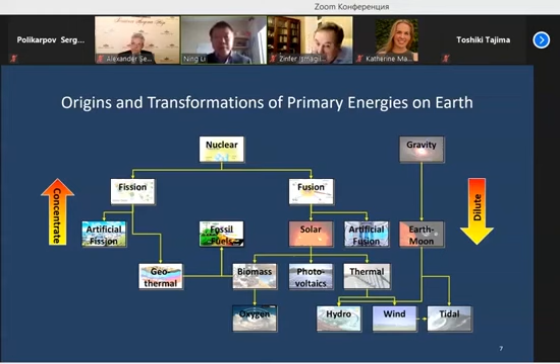So the only thing on Earth, in the natural form of primary energy, is fossil fuel, which is naturally concentrated for us by the geothermal and chemical process. And this is the qualitative picture.

Now if we look at it more quantitatively, I want to distill everything down to the most fundamental interaction forces. I'm using electron volts for each unit—whether it's atom, nucleus, or molecule—to look at what energy barrier you have to overcome, what the energy release is, and what the thermal energy or operating temperature of the system is.

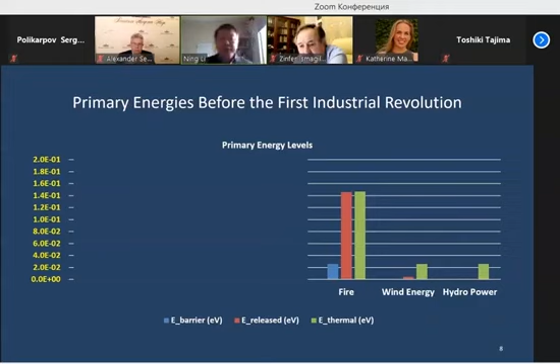So on this scale, which is only milli-electron volts to tenths of electron volts, you can see fire is much higher than wind and hydro. We got helped by nature because of lightning, striking of stones, etc., and then we were able to use fire as our primary energy before the Industrial Revolution. And then we discovered the use of fossil energy.

And of course, we also had solar energy, which is the largest growing energy in the last decade or so. From this year on, I think it's going to be the dominant new capacity of energy generation globally. And we're also helped by nature, because we're able to use fire and naturally existing reactions preceding this seemingly more difficult form of energy.

So that shows the potential of what nuclear can do, if we use the energy from nuclear fission and nuclear fusion. Now I have to use a logarithmic scale to put everything together in one picture, so you can see the progression of the difficulties of using them, and also the potential of using them.

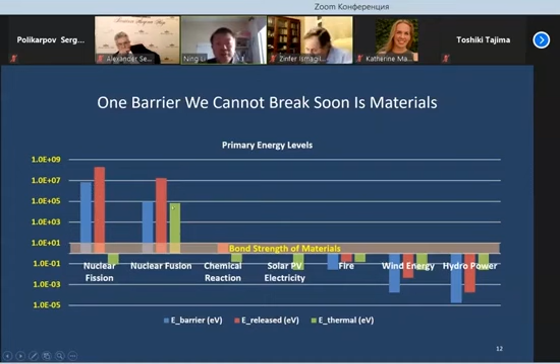Now, fission is very different. Fission has to solve a whole different set of problems than fusion. So we've had this urgency discussion before, and here again is using that energy idea.

Look at just biological life, metabolism and lifespan—they are determined by the Arrhenius equation through activation energy. A 2-degree increase of average temperature on the surface of the Earth would increase metabolism by about 20% and shorten lifespan by 20 to 30%.

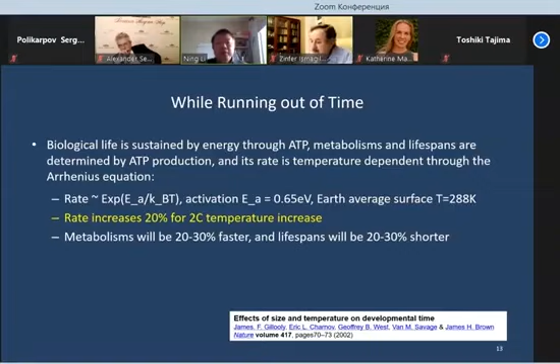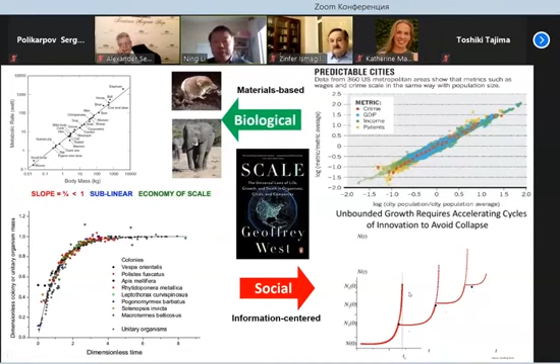This is a drastic change that biological evolution just cannot adapt to. And this isn't just happening in these particular areas—if you look at one of my favorite physicists, in a book about how social and city development is happening, they are all accelerating at a super exponential scale. So we're basically having a compounding problem, and the problem coming at us is bigger and faster.

So how do we apply this thinking and these constraints to our nuclear problem? Now, understanding the primary energy hierarchy and having a view of the cycles, we understand that artificial nuclear energy can only be utilized through heat. And it's not a driven system—they are not driven. We need to control them at criticality.

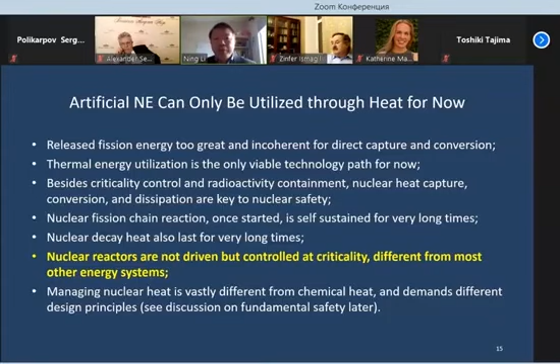And this is different from any other system, which will change—wholesale changes in the safety categories, in the design principles, and how we build and operate the systems. So by fundamental safety, I'm talking about typical reactor safety, but also expanded to include ecological, environmental safety, economic, regulatory, investment safety, and non-proliferation nuclear material safety.

And this will lead to a set of things we need to be doing. Now it looks like a daunting challenge—how do you do all this stuff in the short amount of time that's available? Well, if we go back again to the basics, we may be able to understand how we can do these things without bringing or minimizing unintended or unknown consequences.

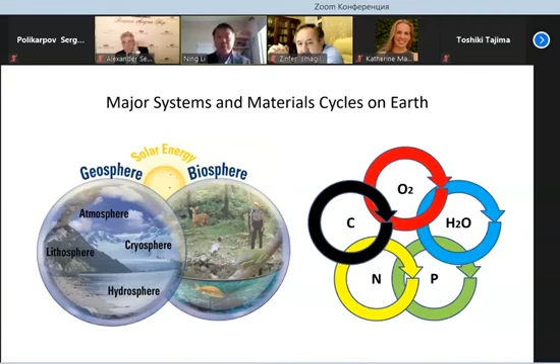If you look at the major systems and materials, all the previous six presentations in some ways talk about the systems we are in and the cycles, whether it's carbon, oxygen, water, nitrogen, phosphorus. These cycles, if driven by external energy, can be sustainable - it has been sustainable on Earth for billions of years. And because we are part of the system, using that system to generate energy is the most familiar approach to us, so we do a lot of it. And that got us into trouble.

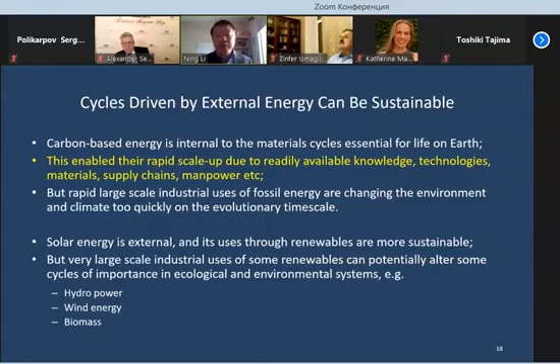One issue is we are able to scale these systems up very quickly, and once we scale them very quickly, we also cause ourselves all these problems. These problems are inherent in all the fossil fuels, but also in many of the renewable energy systems, because we are changing the system and the cycles.

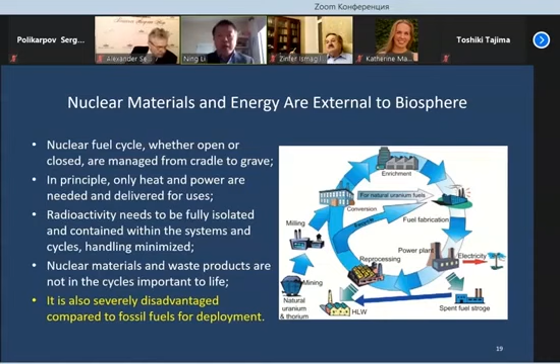So we have to somehow bring in this use of nuclear energy through some accelerated approach that minimizes this barrier.

Now, one of the barriers is how we think about nuclear energy. For over six to seven decades, we thought, based on early understanding and presumptions, that fissile elements were very rare, and we'd need a fast reactor with a high breeding ratio to meet growing energy needs. But the MIT study for the future of the nuclear fuel cycle in 2011 pointed out these assumptions are outdated and mistaken. And if we are working on outdated and mistaken assumptions, the more we do, the more trouble we get into - and we just can't move forward, as evidenced by nearly three decades of stagnation or decline of global nuclear energy.

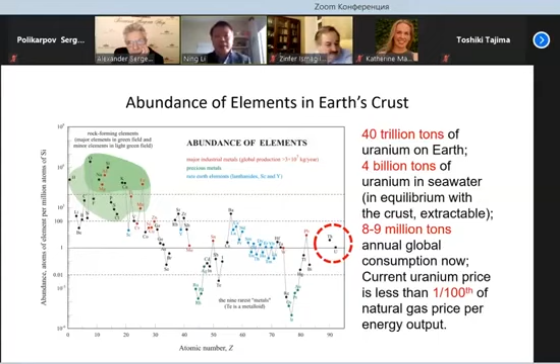If you look at these assumptions - what I call the cosmic energy cycle - thorium and uranium, with uranium being the predominant fissile material for nuclear power, are really, really abundant. We have 40 trillion tons of uranium in Earth's crust, and 4 billion tons in seawater, kept in equilibrium with the rocks. We only use 8 to 9 million tons per year globally right now. And the price per energy output is less than one hundredth of the price of natural gas. So we were designing and operating a system based on a totally different reality of the availability and cost of these resources.

Five minutes more. Yeah, okay.

The increasing safety requirements led to degrading economics and flexibility of deployment, which led to a lack of fundamental economic, regulatory, and investment safety. Current technologies often add complexity and cost, lacking fundamental assets in ecological, environmental, and regulatory safety. Mainstream reactor designs, adapted from early military uses, lack fundamental non-proliferation of nuclear materials. So on one hand we want more clean, low carbon energy, but on the other hand we have many headwinds opposing its growth and expansion.

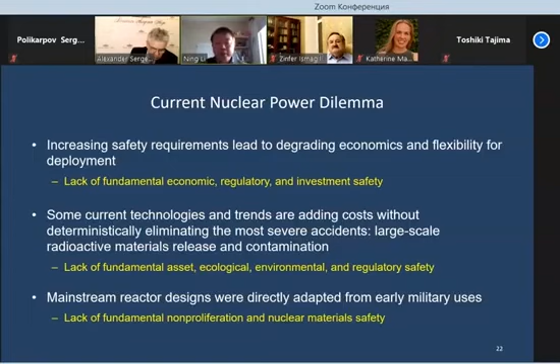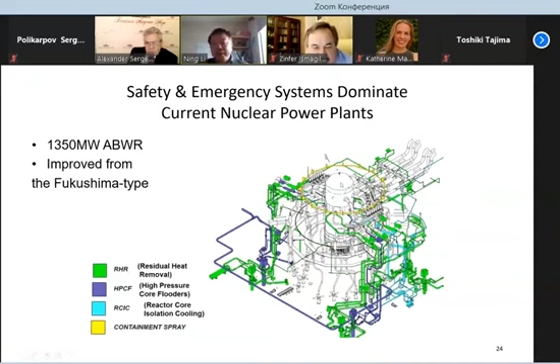In one picture, I can show that because of how we approach the design, construction, and operation of the system, we added layers and layers of safety and emergency systems without fundamentally eliminating the problem of nuclear power. Tracing the source: the power density of the fuels is too high, the radioactivity leakage barriers are not high enough, and the reactor designs have too much power and too high a power density. Not only are they only suitable for large baseload powering large grids, you can hardly build them in less than a decade or two. So you cannot do much about nuclear energy this way, and that's why it's lagging behind.

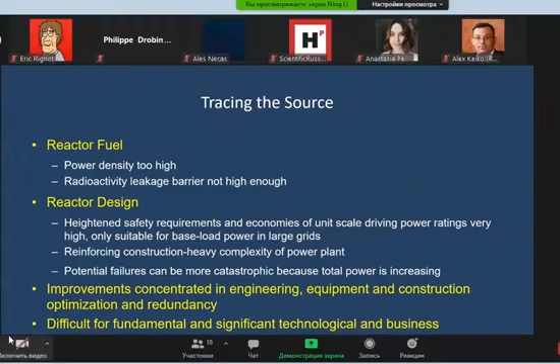So you step back with the understanding of the uranium resources, and then ask, why do we use nuclear power? We use electricity, heat, propulsion, and of course it needs ease and safety of ownership and investment. In this context we're also talking about mitigating climate change, and we have to scale up deployment in time, otherwise it becomes less of a contributor.

I don't have time to go into how these things were derived, because we are also developing and investing in these. This is what's built from the ground up, and we reached a more abstract level with these main points.

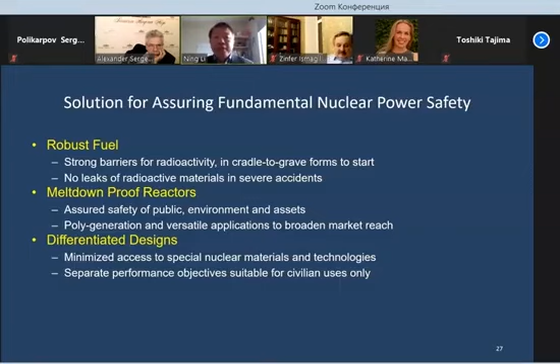One is we need robust fuel and meltdown-proof reactors, and also differentiated design. The safety-based design principles have to be rethought, because nuclear energy systems are so different from the others.

I saw an earlier presentation about effective power density of nuclear, which is actually lower than natural gas by his calculation. It's still missing the element that's considered there: nuclear power density, although it looks low, the energy density is 100,000 times higher, 10,000 to 100,000 times.

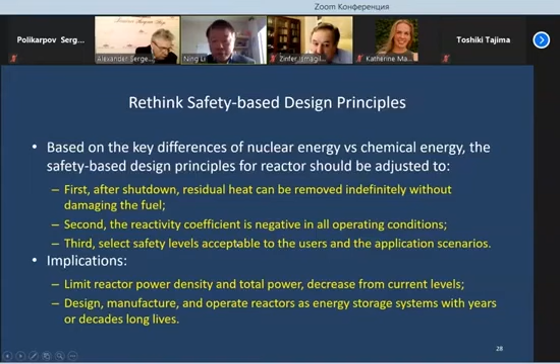So when a nuclear reactor stops, it's not a stopped system, it's still an energy system. We have to reconsider how we design the systems by considering the shutdown conditions and the operating conditions, then pick the level that's suitable to use. That will lead to a very different kind of nuclear reactor.

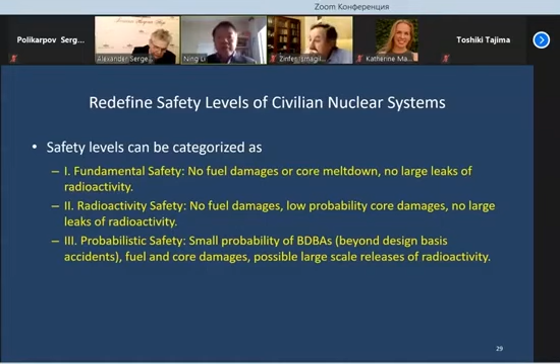Then we can redefine the safety levels: from fundamental safety, which is no fuel damage, no radioactivity leak, to radioactivity safety, where the reactor can be damaged but fuel is not damaged, to probabilistic safety, which is what's currently adopted - there's a small probability of those things happening.

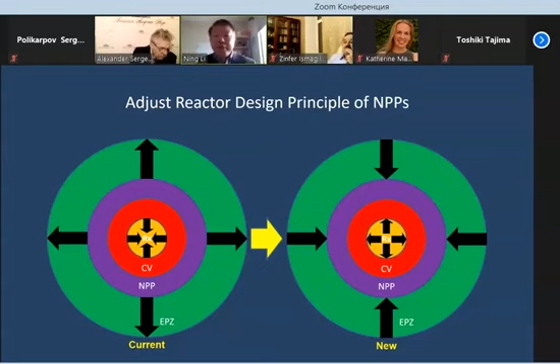That gives us, in a schematic way, how instead of making the reactor more compact with higher energy and total power, we should relax so that the consequences are reduced. So there's an optimization going on with this approach, and the differentiated design.

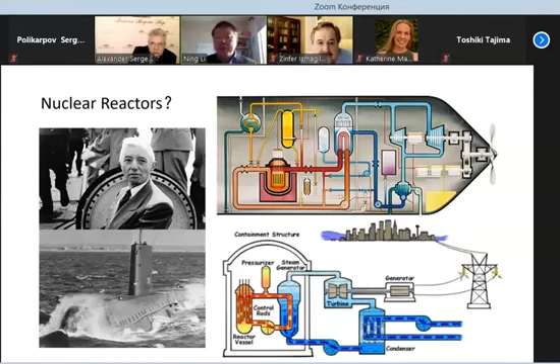To summarize, I think nuclear energy suffers from these challenges: rising costs, safety concerns, and very limited markets. Conventional problems typically create a cost and safety dilemma, and of course there's also safety, security, and non-proliferation - those are post-design add-ons that always add to complexity and cost.

I proposed, and we are in practice doing this, to rethink the safety goal and design principles, and then basically get into nuclear 2.0: a fundamentally safe and manufactured system.

I'll conclude by recalling a conversation I had when I was advising Bill Gates. We had sit-down talks with leading nuclear executives, and he half-jokingly said, I don't understand Gen 3, Gen 4 nuclear energies - it's making the same output, just more costly with more layers of system. How do you survive in a technological world? Well, it wouldn't. So there's something fundamental that can be improved and needed for civilian nuclear energy, and here's a way we proposed to approach it.